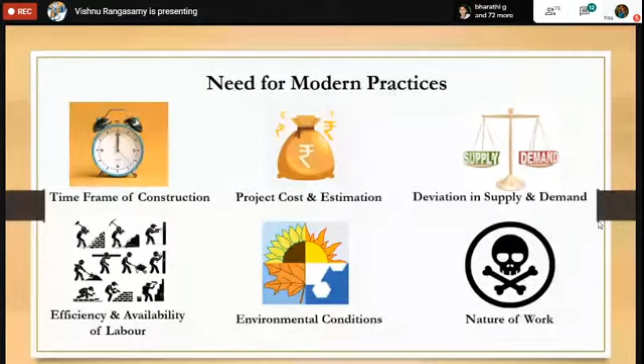If you are fabricating something on the 15th floor, some laborers will not be ready to work in such situations. Then high-tech equipment is the only option you can go for. So I'll give you 5 examples that I have come across.

So the first example is a situation where our client requests us, or a situation where we take on the project. Two international Montessori schools were located within a 2 kilometer radius. Let's assume there are two different Montessori schools. One of our clients comes to us needing to complete a block within 5 months, so that he can get admissions for the next academic year. He is running a school.

The project details: it's worth 45 crores. The total area is 4 floors, each floor around 15,000 square feet. You have only 5 months. After 5 months, you need to apply for academic inspection of the building so they give permission for students to enter and learn.

The nearby school has already started their project 3 months prior. Remember, at the point of admission, their net profit is around 4 to 5 crores per year. It's an international Montessori school, and their fees are around 2.5 lakhs per year. It is a new building.

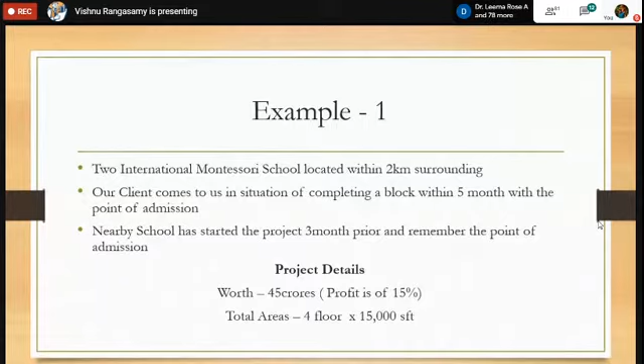Next, garment - Tirupur is the hub of textile. They want us to complete the projects within a fixed time so that they can start production and achieve more profits.

Let me discuss example two. The garment company needs a production unit of around 60,000 square feet, that is 2 floors, within a time frame of just 100 days.

They have obtained an order - usually during Christmas they have clients from England and US. There was an order worth 700 crores for Christmas. It was given to us in the month of May, so we have only 100 days to complete the project.

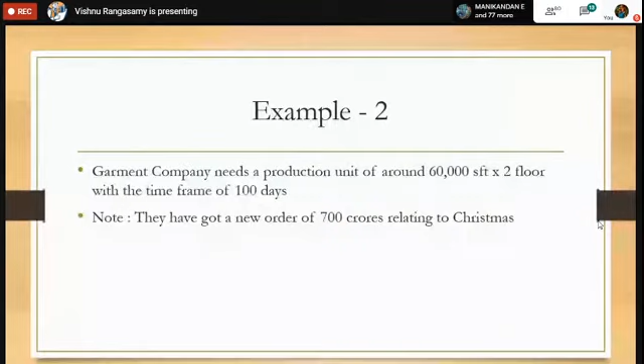We did it - I'll post the solutions at the other end of the PPT. So this is the second example where we need to complete the project within 100 days. You cannot complete a 60,000 square feet, 2-floor building within 100 days following a conventional method of construction, like raising the footing, then the column, then going for the slab.

This is the third example: a commercial complex. It's a 5-story building wishing to have a showcase balcony, where they can showcase their products in front, like a roadside display. It's a cantilever slab where they can keep some of their products, so those walking on the road can see what is inside the showroom. Without disturbing the customers, we need to complete that within 20 days.

It is in 5 floors. Each floor is around 120 square feet, that is 12 by 10.

So we use 12 by 10. It must be completed within 20 days without disturbing, since it is in a commercial complex, you must not disturb the customers who are coming inside.

The fourth example is a knitting unit that wants to complete the project within 60 days with an area of 30,000 square feet, based on product demand. It is a storage unit where they bring products from the market to store. You cannot store some other product elsewhere, and when it is needed, you cannot bring it in, so the transportation cost increases. If you complete the knitting unit within 60 days, the transportation cost will be reduced.

Note that in this project the ground floor is concrete and the first floor is roofing sheet.

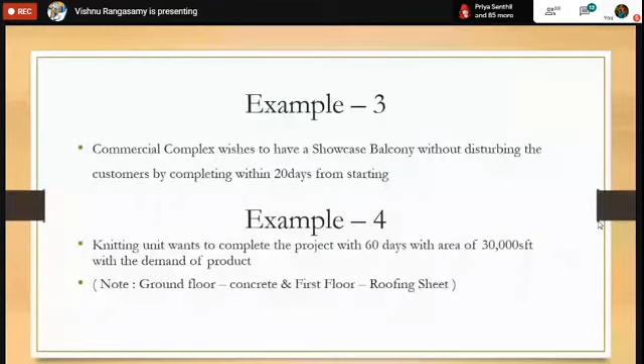Next, a simple project, building near an HT transmission line. It is a current transmitting unit, so the government permits only 30 feet building height near the transmission lines. The owner is a knitting unit owner, so we designed the basement height as 2 feet, first floor 12.5 feet, second floor 12.5 feet, and parapet 3 feet, nearly 30 feet. You cannot go more than that.

In this, the main problem is that if the floor height is 12.5 feet, it is the inner clear dimension, so you cannot have beams. If you provide beams, the space between the floor and the roof gets reduced.

So what is the solution for this kind of problem? We will deal with it in the next slide.

The main problem with example 5 is that you cannot have beams. If you have beams, the space between the floor and roof gets reduced, and you cannot do false ceiling or other electrical items. That is the main problem.

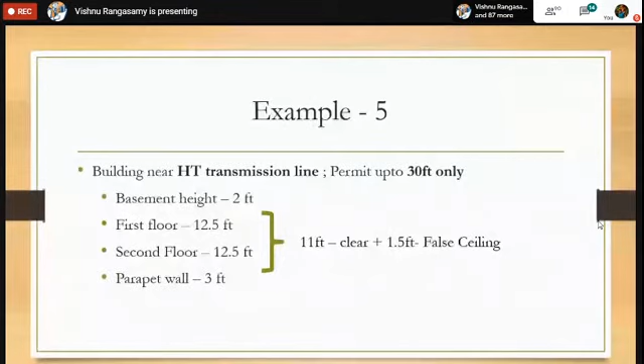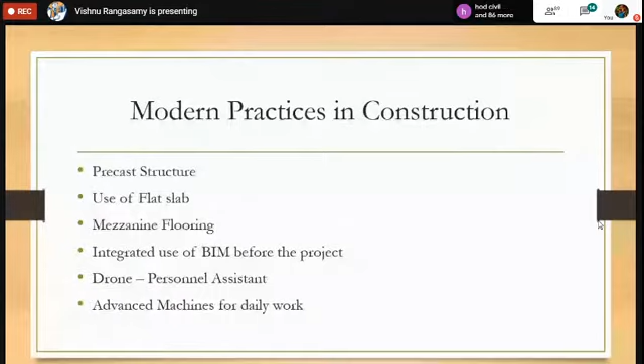So what are the modern practices we follow in day-to-day construction? Precast structures, use of flat slabs, use of mezzanine flooring, integrated use of BIM, that is Building Information Modeling, before the project, coordinating simultaneously while we proceed. Next, drones as personal assistants. Advanced machineries for day-to-day work will replace some unskilled labor and create huge employment for skilled and educated persons.

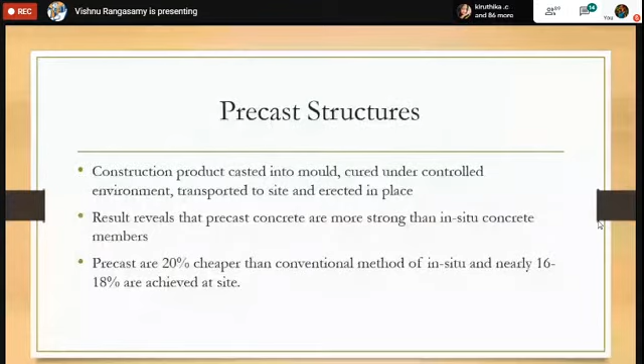As you have already studied, a precast structure is a construction product that is cast into a mold, cured under controlled conditions, transported to the site and erected in place. Results reveal that precast structures are stronger than members cast at the site.

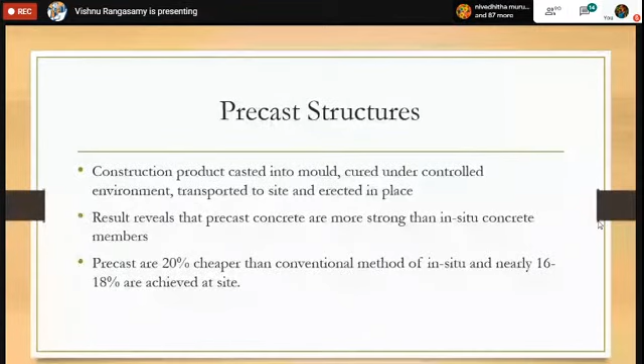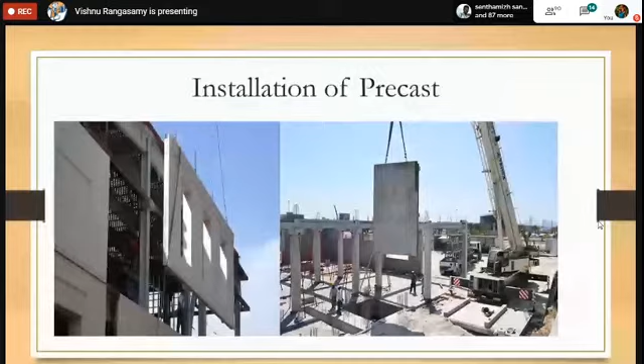What are the advantages? Faster construction, good quality, can be tested in controlled conditions like NDT, non-destructive testing, so if there is any crack it saves money. As I told in the previous slide, we get 16 to 18% efficiency. Next, thermal efficiency, and low maintenance.

In precast structures, we use advanced and recycled products for the outer surface, and inside for casting we use some recycled products with concrete as the main member, achieving thermal efficiency. We can apply waterproofing chemicals for dampness. These are the advantages of precast structure.

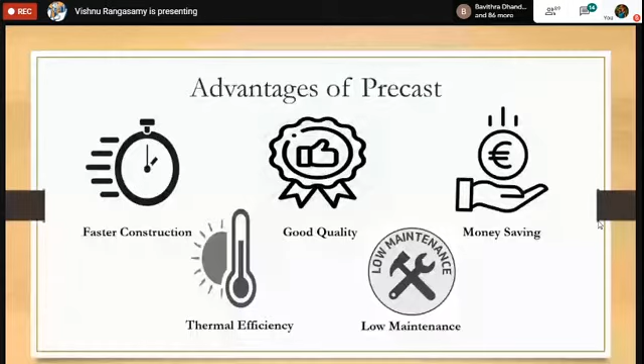If there is any doubt, you can stop me in between.

What are the types of precast structures cast in controlled environmental conditions or factories? We have precast slabs, precast beams like T-beams, or concealed beams used for elevation work. Next, precast columns, and even staircases are nowadays available, plus precast walls as shown in the previous slide.

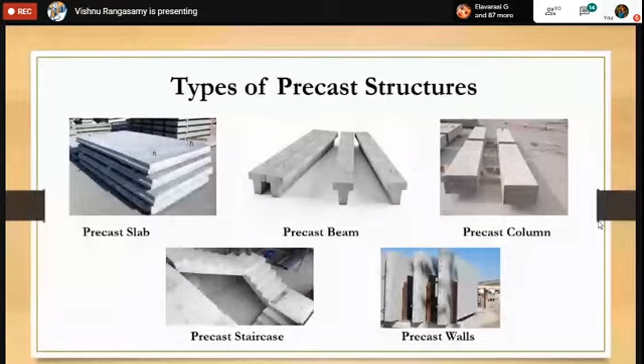They completed it within 3 months, with pre-orders before Diwali sale. I think it was done in 2011. So in Tirupur, near the old bus stand, they completed it within a 3 month frame.

Next, mezzanine flooring. This is the most advanced or developing field in construction. Nowadays industries are building large area buildings, but they don't want to provide roof concrete. So they want pre-engineered buildings, PEB buildings, where you have engineered steel structures. The column is made up of steel angles, and the roof is made up of steel sheets, galvanized sheets with thermal efficiency.

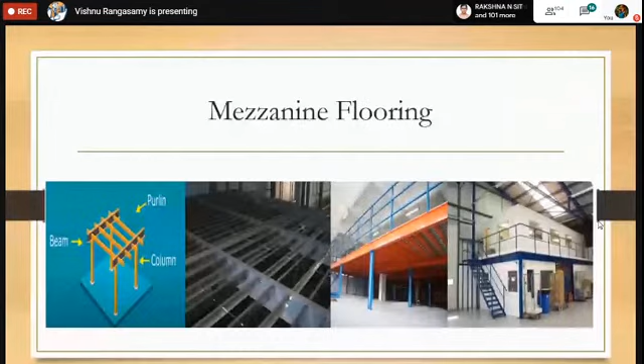So these are the real-time examples. The first one is made up of a clothing section, the second one is an empty room. The third one, the inner space was around 30 feet, so we divided it into 2 floors, ground floor and first floor.

Each floor was around 15 feet in height. If you want more height or more floors, you can even go up to 40 to 50 feet. You must design the steel structures, the pre-engineered buildings, to that extent, so they can withhold that 40 feet height of roofing sheets, purlins, and girders used in the pre-engineered buildings. So these are the real-time examples.

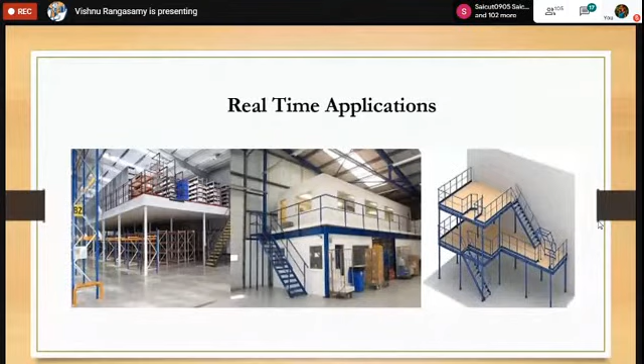Next, building information modeling. What is this building information modeling? As I've seen in the browser, many of you have already learned something about it. It is a tool to efficiently plan, design, construct, and manage buildings and infrastructure.

Like we used AutoCAD, there are so many products for planning, analyzing, and designing. You use StaadPro, eTabs. For 3D modeling, you use Revit, 3ds Max, SketchUp. For planning, Primavera, MS Projects - there are so many softwares available. These are the most commonly used.

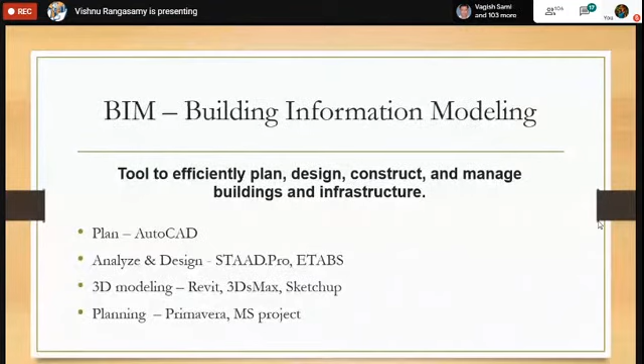But in one of our projects, around 40 acres of land, we had so many undulations, so we had to design the sewer line. It was in block areas individually sold as individual villas, around 40 acres, with many undulations. So we used two softwares, WaterCAD and SewerGEMS.

OpenFlow WaterCAD and SewerGEMS were both developed by Bentley, the software agency that develops such softwares. Note that StaadPro was also designed by Bentley. It is a hydraulic and water quality modeling application for water distribution lines for large areas. As I told you, it was a 40-acre land, so you cannot have a single outlet of water from that whole 40 acres.

So we used the software, and then we used a 3D camera where you can take instantaneous surveys of the areas where there are undulations.

So what is the highest point of the land? What is the lowest point of land? If rain comes, if there is heavy drainage, where will this whole water go and store?

So like this, we did a survey using 3D cameras. It is the most advanced technique which we are practicing in our day-to-day life that can be used. So we brought it from Bangalore. For 40 acres where we surveyed, it took around 12 days to complete the project.

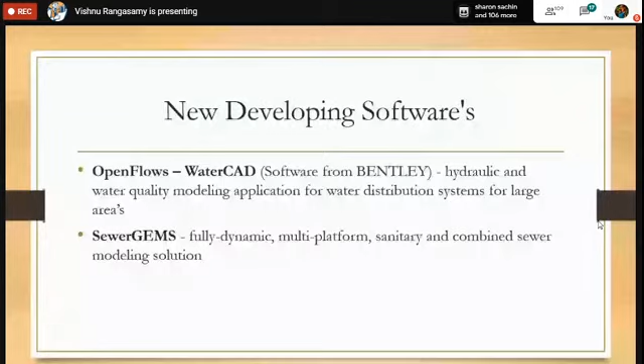So what are the advantages of BIM? It is better collaboration and communication. You can design prior, you can design during the project, you can get the best outcome of the project using this BIM.

It is a model-based cost estimation. You can develop a model within the software so that you can get the best and the exact quantities of materials that are used in the projects.

Like in Revit, you can prepare a report about how much quantity of concrete is being used in this whole project. Nowadays, if the client comes to us with an idea of building, they are not going for a square feet rate building, they are going for a unit rate. So they will have a project engineer on their own behalf, where they develop a full project estimate.

Like if you're doing this project, this much concrete will be used, this much square feet centering and shuttering will be used, this much steel will be used. We will be giving it unit based, so what is the price of the concrete that we are willing to provide. In such conditions, this building information modeling gives you the exact amount of concrete, square feet of centering, steel structures. These exact quantities can be obtained from this building information modeling.

So pre-construction project visualization, that is like 3D views that are developed in 3ds Max, like SketchUp. Next, improved coordination and clash detection.

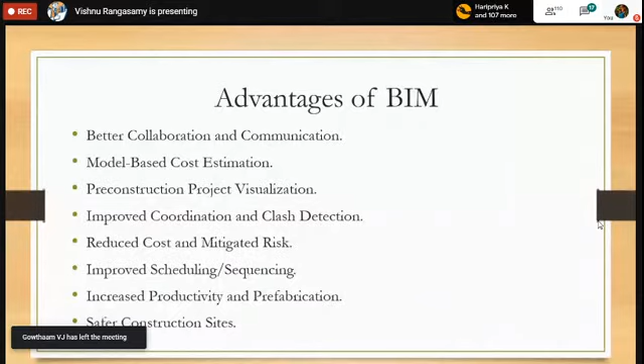So what have you already known about Internet of Things? Let me give a simple idea: a network of internet connected objects able to collect and exchange information.

Like Internet of Things, if you imagine a 40-acre campus, a 40-acre land, you cannot go to and fro. You'll be constructing a building at the entrance, and to some extent there may be a distance between the buildings, so you cannot go to and fro.

So if there is internet connectivity, many construction companies have individual apps, self-developed applications on their phones, so that they can have their information, like what is on the site, material management, activity management, what risk is going to happen in the projects. They will be sharing with each other, so that the MD who is sitting in the office can examine and operate.

They can collaborate with each other, so that they can update the photos of what is going on in the site.

Next, I will be dealing with drones. We use drones in day-to-day activities to have an aerial view. They take photos and videos, so that the MD sitting in the office, and even the client, can see what is happening inside the site - where the concrete is being batched, what work is done today, and even labor attendance is nowadays taken through drones.

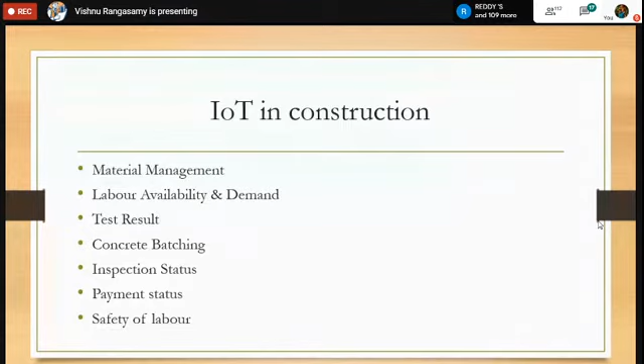You can have test results, concrete batching unit details - at what time it was batched within the site, what is the inspection status, what is the payment status, and the safety of the labor. All these can be coordinated through the Internet of Things.

So this is a chart showing how the IoT of things will happen - like contractor B, we will have a group with the managing director, project manager, design engineer discussing the progress of the project, the quality, and the payment between the contractor and the client, and between the contractor and the suppliers of materials.

Next, the working methods that we ensure and look after inside the site, and the safety of the labor, will also be discussed in this IoT of things. So what the contractor and client always look for is the project's progress, quality, and payment - their main motto is to balance these three points.

Nowadays the client also has engineers called client engineer, client project manager, quantity surveyor, quality surveyor, who look after whether the project is going correctly. Since they are investing a huge amount, they employ these professionals so that progress and quality proceed in the correct mode, and they check and report to their client on a day-to-day basis.

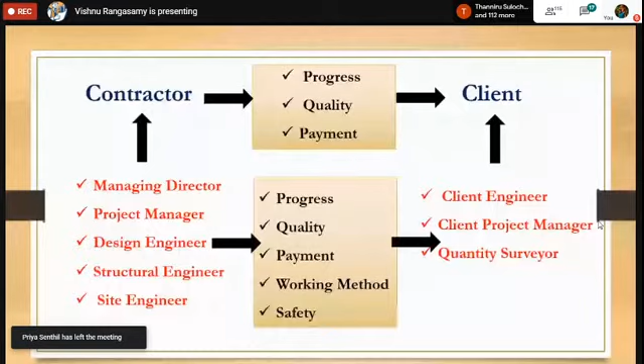Next, the evolution of cementitious chemicals. It is one of the unnoticed branches of engineering in India, in which India is a capital market taking around 2,600 million US dollars - approximately 20,000 crores. Imagine that, a construction chemicals market of 20,000 crores is available.

So what chemicals are used? Admixtures for mortars, concrete, insecticide, termite treatment. It is one of the hottest businesses in construction, involving in waterproofing, epoxy grouting, epoxy flooring, termite treatment, and crack-free renovations. A huge amount of chemicals are required if you are renovating a structure, so there is vast application of chemicals in renovation. Next, bonding agents - if you are cutting a slab, there are a number of bonding agents available in the market for joining the old and new concrete. There is vast chemical application there.

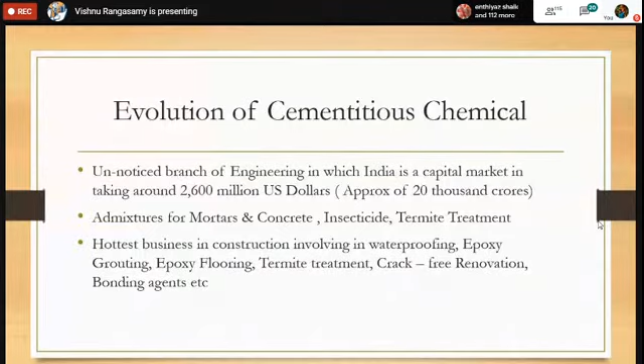So the chemicals we use, as explained in the previous slide - waterproofing, termite treatment, concrete admixtures, curing chemicals. Nowadays, due to the scarcity of water, curing chemicals are added to the concrete so that it requires less water during curing. Next, coloring chemicals, mortar chemicals, flooring chemicals, bonding admixtures. For coloring chemicals, if you require colored plaster - like red or gray - you can go for a coloring chemical like red oxide or black oxide, which we used in olden days. So numerous chemicals are available in the market.

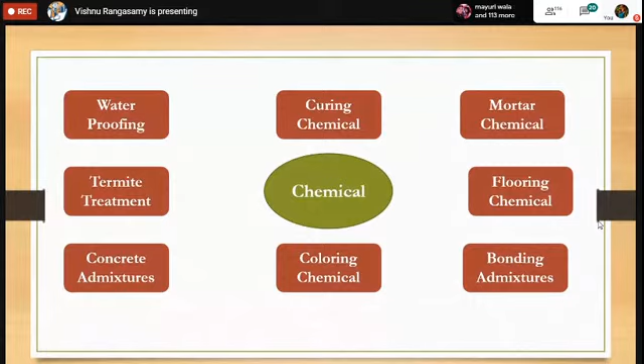So what are the areas of application? Water tanks, rainwater harvesting areas. If you are having 40 acres, there must be some sunken areas. In those days they were constructing wells, bore wells. Nowadays they are developing rainwater harvesting areas and big industrial storage areas.

If you are storing cloths and there is dampness, it will affect the quality of the cloth. So big industrial areas are nowadays going for waterproofing treatment, which will reduce or even stop the dampness.

For prefabricated structures like precast structures, we are going for waterproofing. But inside controlled conditions, we are applying both chemicals as well as waterproofing.

So what are these layers? If you have concrete, you can mix a chemical for the concrete. Next, after the crack, you may coat a waterproofing chemical over that. You may have a bitumen sheet over that. Nowadays most people like...

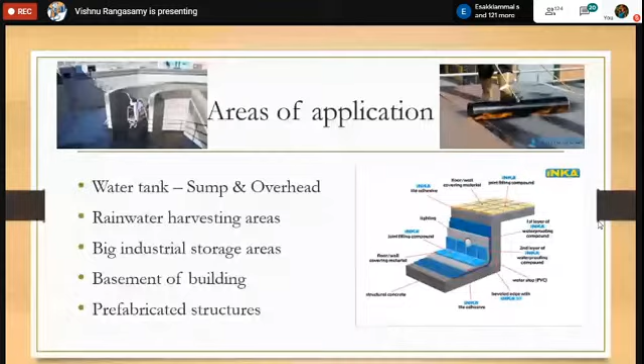Drones are playing a major role, as I already mentioned. You can track the progress of work. An MD will be sitting in a room, and a person operating the drone will have an overall site view. If an owner calls, he will have an overall site view while sitting in the office, having a live video of what is taking place in and around the site.

Project managers will track the progress, the schedule, and whether the work has been completed. If it is not completed, he may develop a new plan for tomorrow.

Drones also improve the safety measures of the working site and labor. If there are any accident-prone zones, they may be cleared off in time. It will come directly to the point of the owner or client, and we will receive a direct order to close or maintain those areas on site.

Next is management of collected information, like material maintenance. What labor is available, whether labor is in supply or demand - you can manage that information.

Management of collected information also helps prevention of open area theft. I would like to share some site experience. There was a store room where we had around 1.5 lakhs worth of sanitary wares, like pipe fittings. We don't know who stole that.

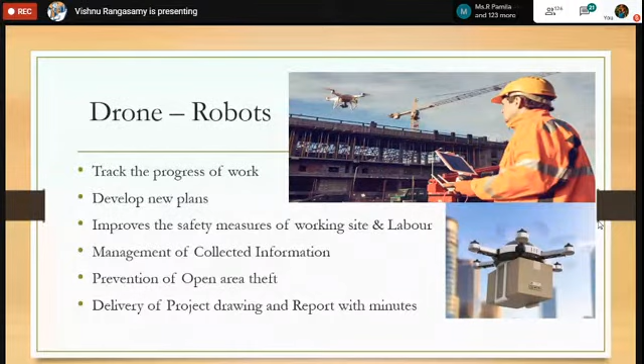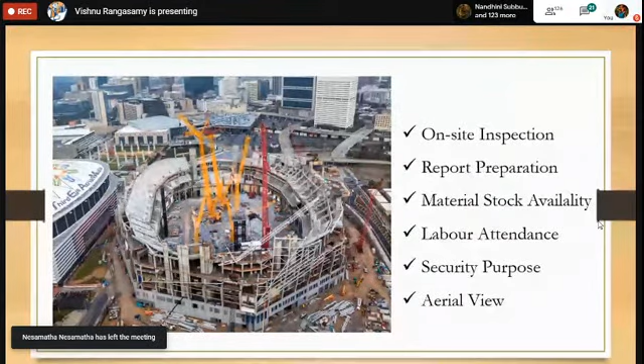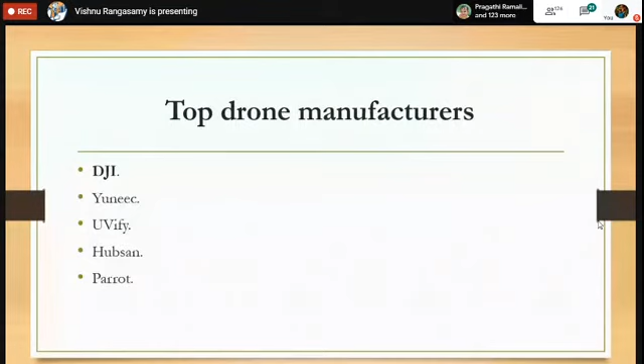So evolution of machines - from this we will see some examples of day to day machines we are using. First, let me talk about the boom placer, where concrete is placed. I don't have an image for this, but you can search for it - boom placer.

If our site is completely surrounded by industrial buildings, so if you are not able to store materials on site, or cannot convey concrete to the site, you can use this boom placer. It consists of a boom extension that can rotate around 360 degrees, and it can extend up to a height of 150 meters, that is around 500 feet, with length up to 72 meters, that is 230 feet. Nowadays what we use, available in Coimbatore and around the cities, is around 200 feet height, and can go for a length of around 100 feet.

So it is highly effective in mass concreting inside cities. Likewise, as I told before, if our site is completely surrounded by buildings, you cannot store construction materials on site, or even if you cannot drive the concrete batching plant to that site due to very small, short roads, you can use this boom placer for placing the concrete.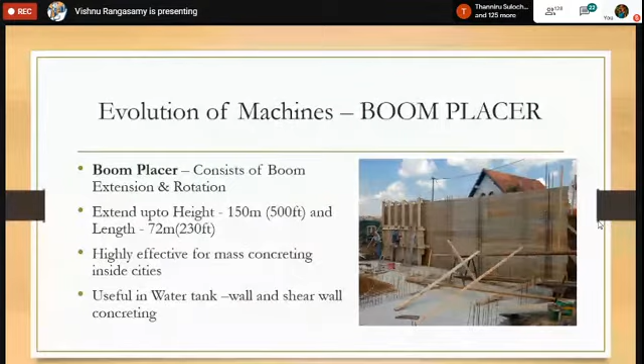If you place concrete manually, it will take more time, but with a boom placer, wastage is minimal - around 1% in the batching plant, 1% in the boom placer operation, and 2 to 3% in the concreting place. So around 4 to 5% wastage is typical when concreting these mass structures.

It's useful, as I mentioned, in water tanks, walls, and shear wall concreting. This is one of the major advantages, but it is expensive for small projects - let me explain that.

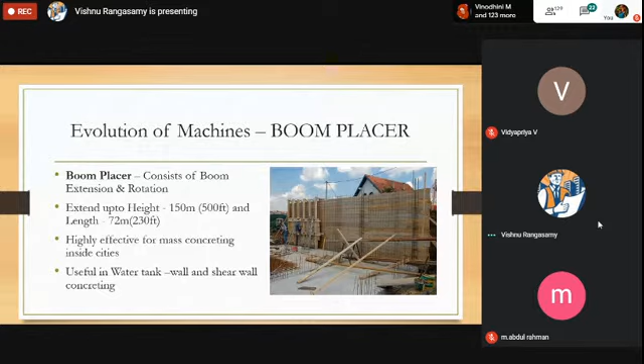So regarding the use of tower cranes, mobile cranes, and gantry girders - tower cranes and mobile cranes are gaining popularity nowadays. Let me tell you the cost: a tower crane costs around 60 to 65 lakhs if you buy new, and installation costs around 2.5 lakhs for a new unit. But if you go for rental, since we have timed projects that must be completed within 5 to 6 months, they give it for rental - for 3 months the rental is around 2.5 lakhs, and installation is around 90,000 to 120,000 as installation charges. These tower cranes, mobile cranes, and gantry girders are used for transferring or transporting material inside the site or within the site zone.

If you're going for prefabricated structure, precast, pre-engineered buildings, tower cranes and mobile cranes are one of the most important aspects you must consider while starting the project. Even gantry girders can be used, but they are less preferable compared to tower cranes and mobile cranes. If it's a big project with day-to-day requirement, you can go for a tower crane. If you have a periodical requirement, you can go for a mobile crane where it will complete its process and leave the site.

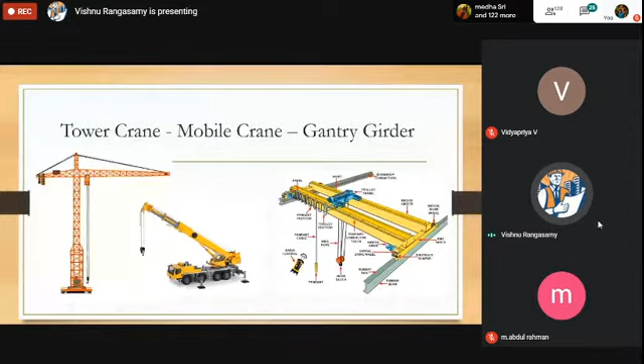For transportation of materials to and fro for the project, studies show that tower cranes reduce the cost of transporting material within the site by up to 1.5% of the total project worth. Mobile cranes can be used for medium budget projects and space-constrained projects. If you have less space, you cannot erect tower cranes, so you can go for a mobile crane instead.

Gantry girders are being used in tying the rebars. Let me show you examples of tying rebars. In industrial areas, even the flooring part has rebar, like steel reinforcement. Since we are placing heavy machineries and the flooring has to absorb the vibrations produced by them, the flooring even consists of reinforcement like slabs. These gantry girders are used for tying those rebars, that is, binding the reinforcement.

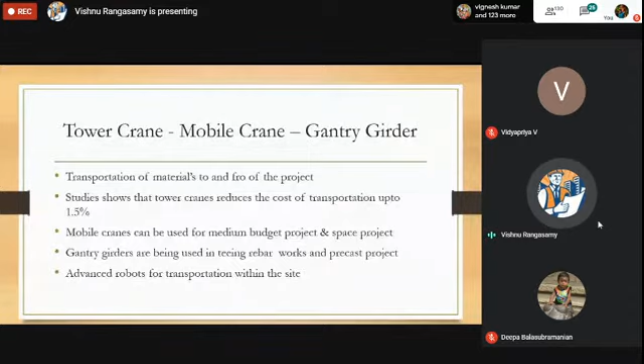Advanced robots are used for transportation within the site. I'll show you some images at the back end of the slide. These are the applications, or the modern machineries that we are using in day-to-day construction.

If there's a big project, you can even set up a batching plant within the site. All you need is 2,500 to 3,000 square feet area for setting up such a small concrete batching plant. The second image shows that you can even cast a big column up to 10 feet in height within a short span. If you pour this concrete, you don't need any manual labor for vibration - the machine will both batch the concrete and do the vibration. These are some of the modern technology and units being used in day-to-day construction works.

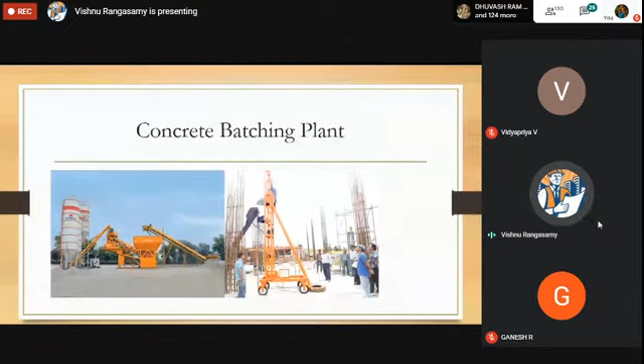Next, steel fabrication. Nowadays, in pre-engineered structures, all the engineering structures are prefabricated in the factory itself. For pre-engineered buildings, all the girders, purlins, and steel structures are done in the factory, then transported to the site and erected. As we have done, it took around 40 days to complete a 60,000 square foot building - the superstructure took only 40 days to complete.

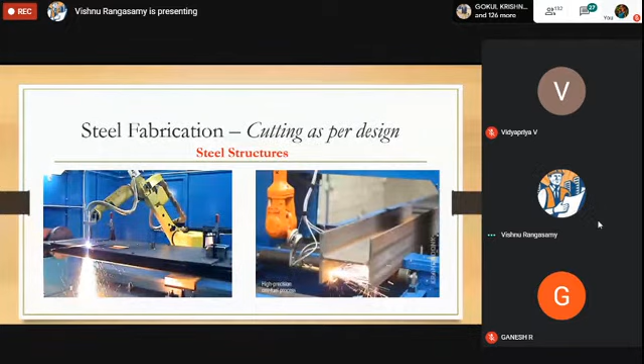When we are starting the project, let me go to the next slide. This is the application of robotics and technologies in casting or preparing the materials that have to be fabricated at the site.

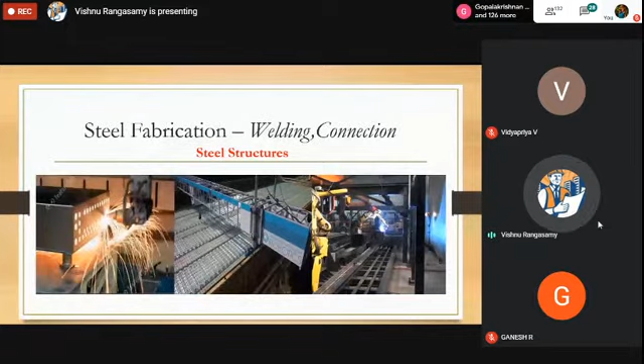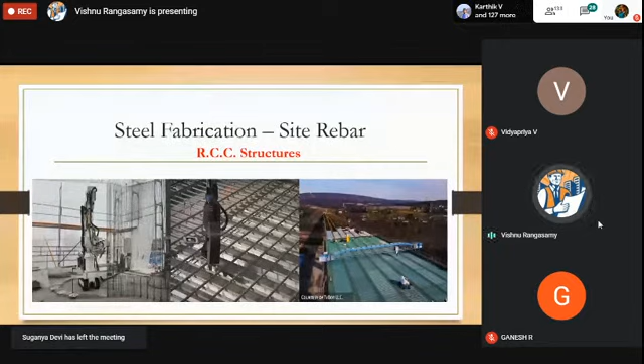So these are some of the small tools that we come across in day-to-day life, like steel cutter. Nowadays, all the structural engineering drawings, like beams, what we cast, is completely fabricated within the sites.

A normal steel rod is around 40 feet. If the structural drawing allows, without any gap, like a 60 feet rod is required for those beams, we can order from the steel batching plant, the steel manufacturing unit. So 60 feet rods are readily available, ready to help us in building those structures. If you do not have steel fabricators, the workers who do steel work, we may not require them for cutting the rods on site.

If you give the structural drawing to those factory owners, they will get ready the length of the rod, the ring size, the shear wall dimensions, the cross rod, the chair rod - all will be fabricated in the factory itself. You will get it ready on site within a short span of time, using huge types of advanced machineries.

The first image is a steel cutter. The second image shows a bar bending machine. The third image is a hand rebar tying machine. The first machine costs around 60 to 75,000, actually around 1.5 lakhs. The second machine is also around 1,30,000. The last machine costs around 60,000 rupees.

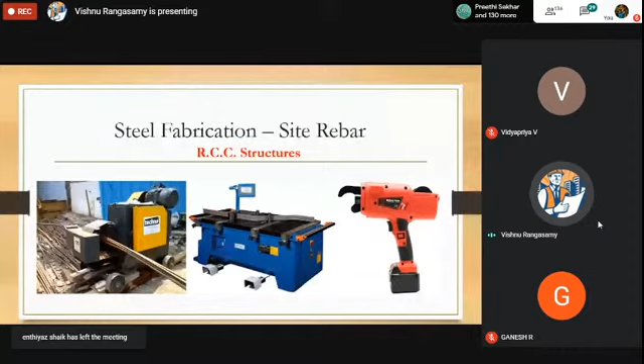What is a spirit level? What we do in surveying equipment - the main purpose is that we must make that spirit level constant or correct. Once that is done, you start the machine using a remote control. These types of machines operate with efficiency up to 1 hour. For 1 hour, it will do the flooring up to 200 to 300 square feet.

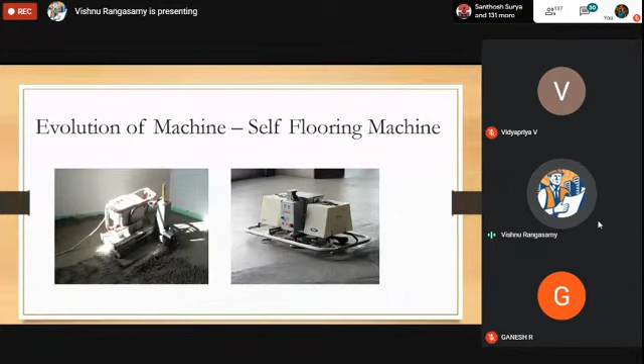It is highly efficient compared to human labor, and the efficiency is maintained throughout the day. Compared to human beings - in the morning they are very active, while going for lunch they slow down somehow, and in the evening a little bit too - these machines have constant efficiency. You can calculate to some extent the progress of the project. The first and second images show these self-leveling flooring machines.

Nowadays granite and marble can be processed using CNC machines. If you have a design, those grooves can be prefabricated - whatever design has to be done in the granite, like U grooves, V grooves, different types of designs in the granites. You may even insert a dark strip inside a white marble. You can do some designing works using these advanced technologies, inserting a CAD design.

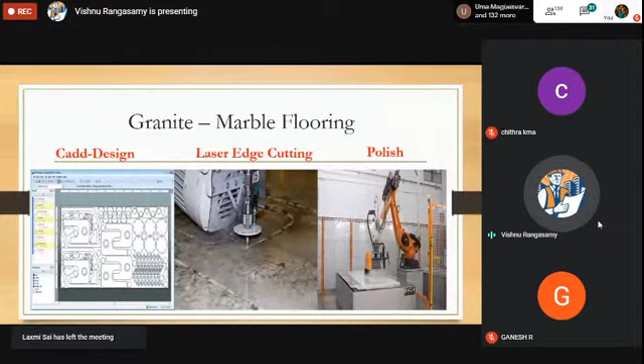Next is laser cutting. Nowadays granite mainly deals with water jet cutting, because marble is much softer, so we go for water jet. After completing the overall process, we may go for machine polishing, which requires less time. Instead, after erection of granite on site, if you go for polishing, it requires human labor - human polishing is the only option. But if it is inside the factories, it may be machine polishing.

So these are some of the techniques that are used today - special art painting. We used this in the example, in that school, the corridors and the Montessori LKG, UKG classes, up to 6 feet, needed a normal painting. When we prefer artists, they do not have such efficiency to do that, and we had very less time, so we cannot opt for manual labor within the short span of time. So we adopted a machine brought from Navi Mumbai.

It cost around 75,000 rupees per unit, and we also brought human labor who can deal with those. The only thing we need to do is give the image that must be drawn on the walls and corridors, and the colors that has to be filled inside those drawings - all must be pre-installed or pre-recorded, coded within the software. Once it starts drawing, it is highly efficient compared to a manual artist.

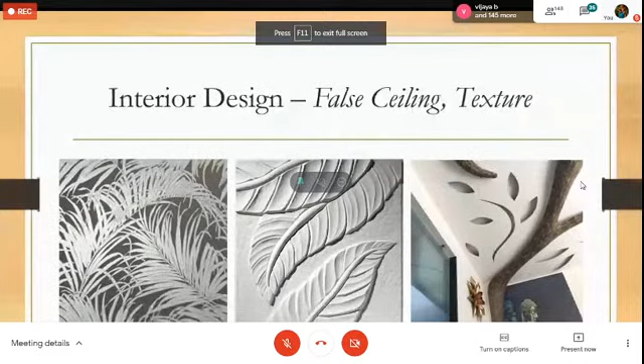If you want to do some Vinayagar or Murugar, you can use this 3D printing technology on the walls. CNC laser cutting is used on doors, main door teak wood doors. This 3D printing can be done using putty, for false ceiling as well - it can be done using these 3D robots.

Next is sustainability and green building - this is one of the fields gaining more and more demand currently, because the government is going to give a huge amount of funding, plus reduction in taxes that contractors pay. If you go for a green building, after achieving the parameters given by the government, engineers and consultants, they will provide some cutoff in the taxes you pay to the government on completing the projects, and it will also reduce construction cost.

It will generate a number of renewable energy sources like solar and water, you have very fine ventilation in those green buildings, and sustained healthy living. As mentioned earlier, there will always be efficiency of water as well as electricity used inside those green buildings - it is one of the modern practices we are coming across in day-to-day life.

Even the client wants us to build green buildings. If there is a green building, as I told you before, government also funds you, and it will also cut off some of the taxes we are paying - so those two are the main parameters.

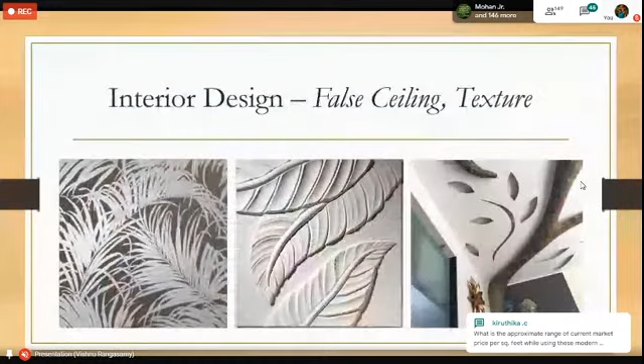Sir, good evening. Sir, good evening.

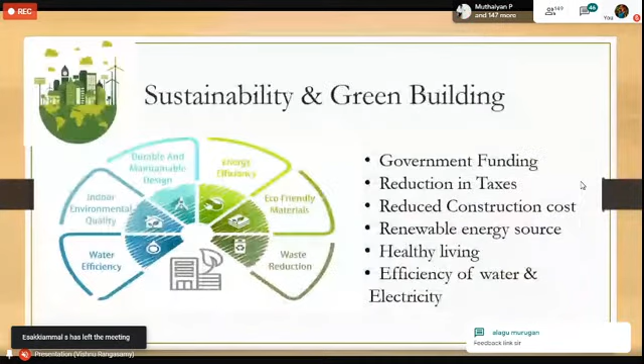Sir, actually, regarding the initial cost we have to spend before starting construction, and according to the current situation of our industry, do you think upcoming investors or stakeholders will invest this much in our industry, sir?

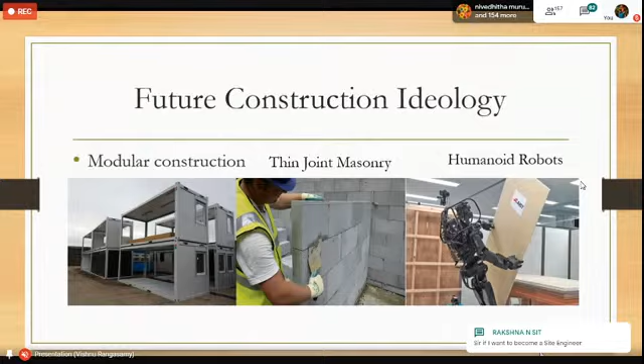Okay sir, I do not know that, I cannot get that. I think it is not clear. I think he has a doubt about cranes to be used in a PEB structure - he is asking whether cantilever girders can be used for pre-engineered structures. It cannot be used, if you consider some of the buildings we did.